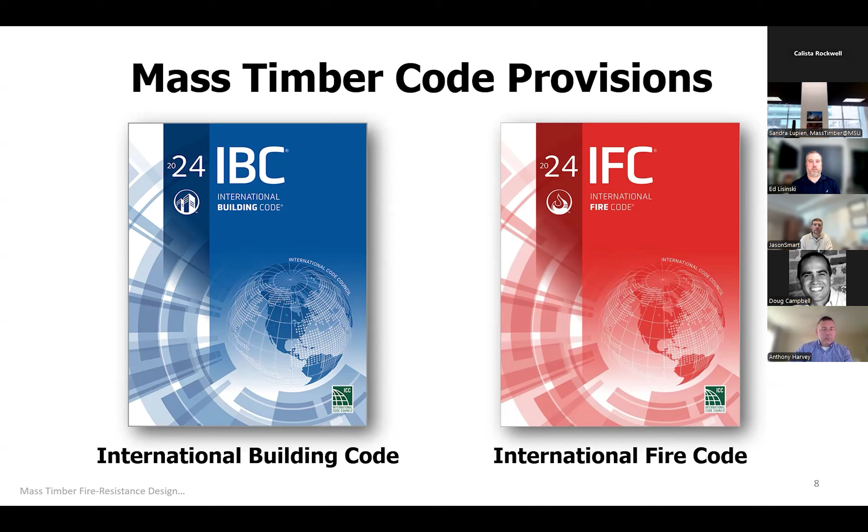As you probably know, the three new mass timber construction types in the I codes are types 4A, 4B, and 4C construction. Several of the key performance features built into these new provisions for 4A through 4C construction are listed here on this slide.

These are not all of them, this is not an exhaustive list, but I'm just going to go through some of them here. As I mentioned, every building element needs to be either mass timber or non-combustible in these three new construction types.

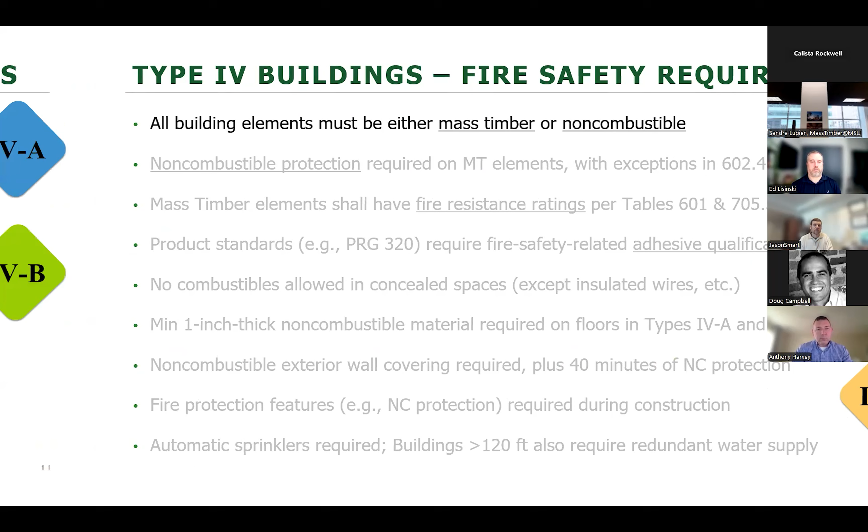Mass timber elements need to be protected with non-combustible protection as specified in section 602.4. For most mass timber surfaces in type 4B, and all mass timber surfaces in 4A, the requirement is that two-thirds of that fire resistance needs to come from non-combustible protection.

Structural elements are required to have fire resistance ratings as shown in IBC tables 601 and 705.5. It's the greater of those two fire resistance ratings that applies.

The adhesives used in CLT are required to be qualified through a series of both small scale and large scale fire tests, to ensure that they do not undergo heat delamination during a fire that could lead to fire regrowth rather than continual cooling.

No combustibles are allowed in the concealed spaces, except for those materials which are currently allowed in plenums by the IMC, International Mechanical Code.

In types 4A and 4B construction, one other requirement is that mass timber floors are required to have a minimum 1-inch thick non-combustible material above the mass timber.

In all three of these new construction types, everything outboard or to the exterior of the mass timber in exterior walls is required to be non-combustible, except for the water resistant barrier, and that's required to meet other fire performance thresholds.

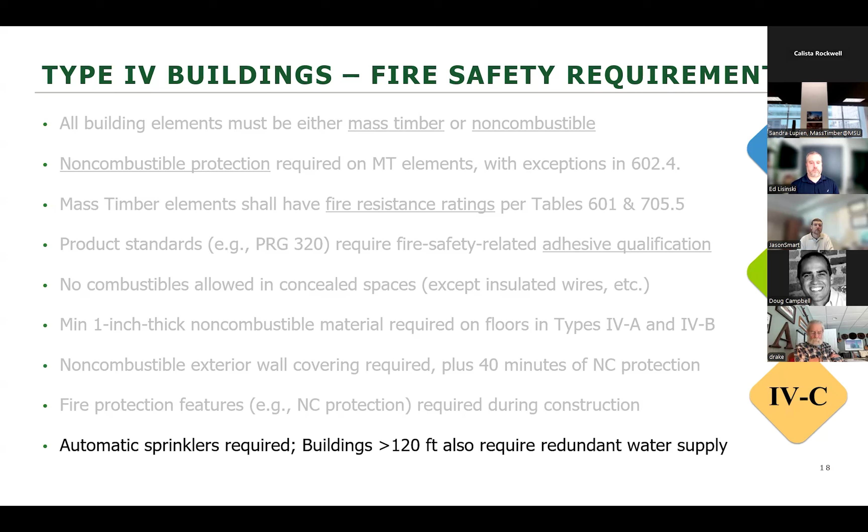These go beyond the requirements for other construction types. Also, shafts are required to be constructed of non-combustible materials in mass timber buildings that are over 12 stories or 180 feet.

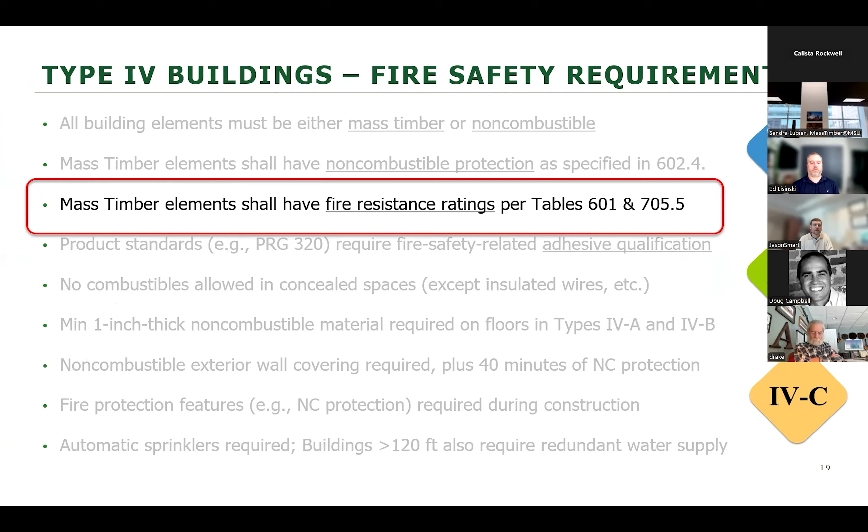But of all the fire safety requirements that we just went through, the one that I'm going to dwell on in this presentation is the requirement for fire resistance ratings in accordance with IBC tables 601 and 705.5. You may know this already, but I'm just going to go through this review.

There are required fire resistance ratings in the building code for given building elements, and that depends primarily on the type of construction in table 601. In the case of exterior walls, there are also requirements in table 705.5 that depend on occupancy group and fire separation distance, in addition to construction type.

So here's one of the big differences between traditional heavy timber construction, now called type 4HT, versus the three new mass timber construction types. The new mass timber construction types require fire resistance ratings for building elements like the primary structural frame, floor, and roofs, whereas type 4HT doesn't have any specific fire resistance rating requirements.

Instead, type 4HT building elements are required only to meet the minimum cross-sectional dimensions specified in table 2304.11. By the way, those same minimum dimensions apply to the mass timber elements in types 4A through C as well, but they also have the minimum fire resistance rating requirements.

Likewise for both 4B and 4C, the same fire resistance rating requirements are applicable as are applied to type 1B construction. So here we have 2-hour fire resistance rating requirements across the board, except for non-bearing walls and the roof, the roof requires a 1-hour rating. Non-bearing walls don't have a minimum requirement.

So despite these equivalencies to type 1 construction in terms of fire resistance ratings, the limits on heights and areas for 4A through 4C are not unlimited, as you can see, or as you probably already know. They're not shown in this table, but type 1 construction, of course, has unlimited heights and areas for most occupancies, but that's not the case for types 4A through 4C. So that just adds one of the several layers of fire safety that apply to mass timber in the code provisions.

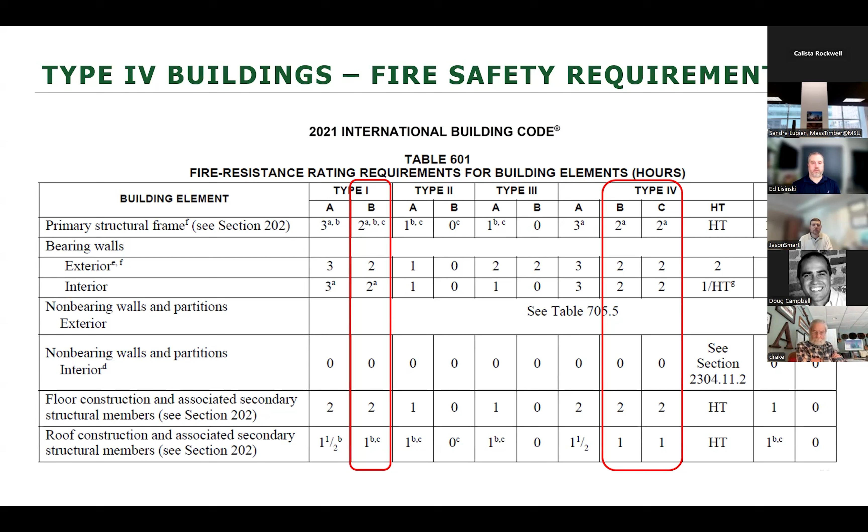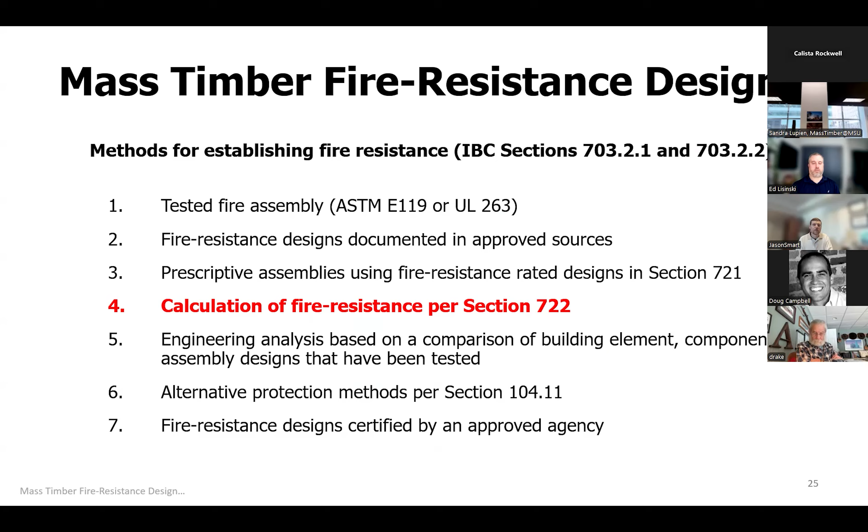Of the 7 recognized methods for determining a fire resistance rating, the one I've highlighted in red here is the one we're going to dwell on most today, and that's calculation of fire resistance ratings per section 722. All right, so moving on to the second section.

So we just took a brief look at the fire safety related code provisions for mass timber construction, especially fire resistance ratings. Now we're going to look at code reference standards and other design guidance that are available for the purpose of demonstrating compliance with these code requirements.

IBC section 722.1, which I just mentioned as one of the compliance pathways for demonstrating fire resistance ratings, references Chapter 16 of the NDS, the National Design Specification for Wood Construction, for calculating fire resistance ratings of exposed wood members and decking.

AWC's Technical Report 10, or TR10, provides background, empirical validation, and examples on how to perform the calculations specified within Chapter 16 of the NDS. So TR10 is somewhat like a secondary reference in the code. TR10 and Chapter 16 of the NDS deal with the same methodology, a mechanics-based methodology, which I'm going to describe in more detail shortly. In fact, Chapter 16 of the NDS is based on the methodology presented in TR10. However, TR10 goes into a lot more detail and actually gives examples on this methodology. So it's a great resource.

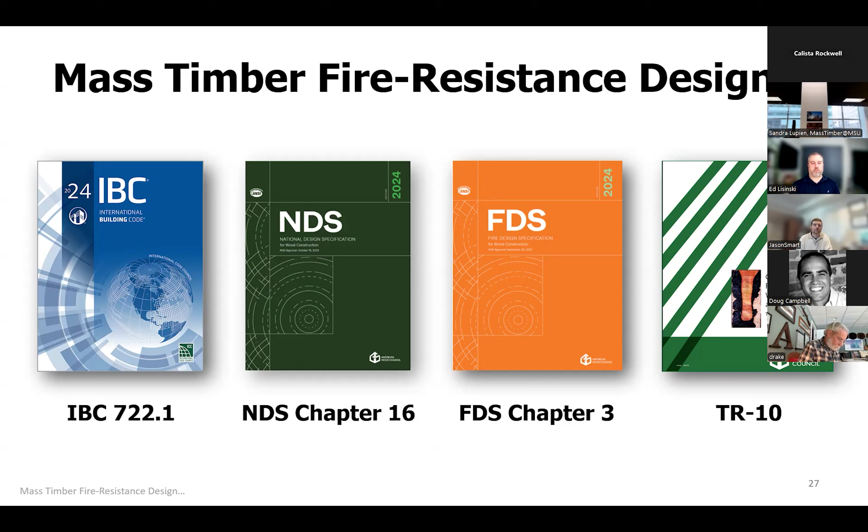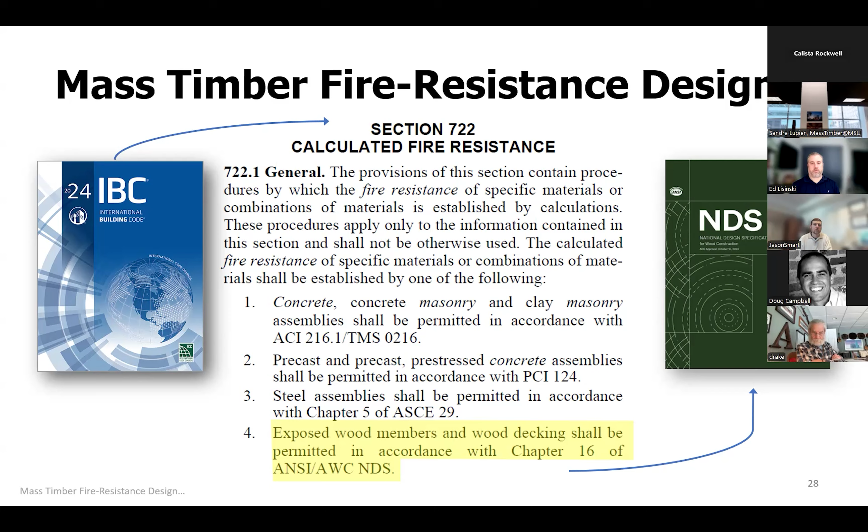Here's the actual code language from IBC section 722.1, which deals with calculated fire resistance. As you can see in the highlighted text here, Chapter 16 of the NDS is referenced as the standard for calculating fire resistance of exposed wood members and wood decking. Notice it says exposed wood members - it doesn't deal with protected wood members, which the FDS does.

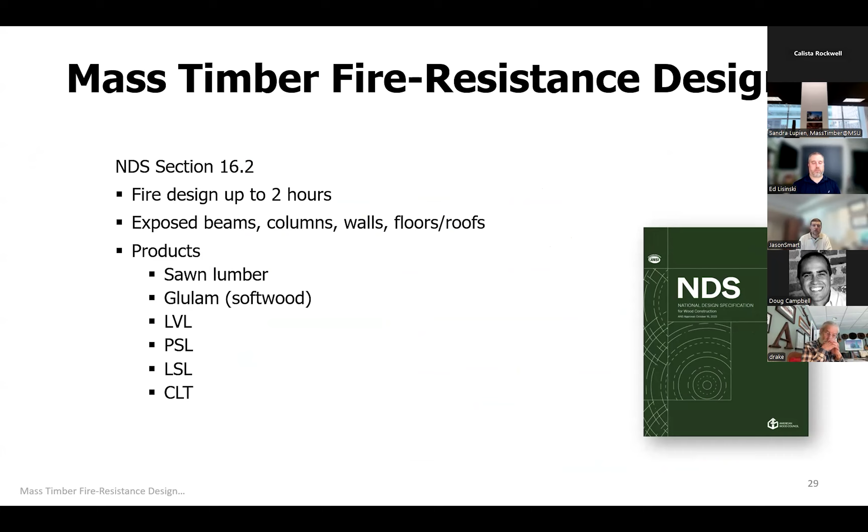Chapter 16 of the NDS allows fire design of exposed wood members for fire resistance ratings up to 2 hours. It applies to any exposed wood member, including those in beams, columns, wall assemblies, floor ceiling assemblies, and roof ceiling assemblies. The materials addressed in Chapter 16 of the NDS include sawn lumber, glulam, structural composite lumber, and cross-laminated timber, CLT.

So the more detailed provisions using the same mechanics-based model are provided in Chapter 3 of the FDS. Like the NDS, the FDS can be used for calculating fire resistance of exposed wood structural members, but the FDS provides a lot more guidance. For example, it has provisions for calculating the fire resistance of protected wood members, fire resistance rated assemblies rather than just members. It can be used for assemblies and also for fire protection of connections.

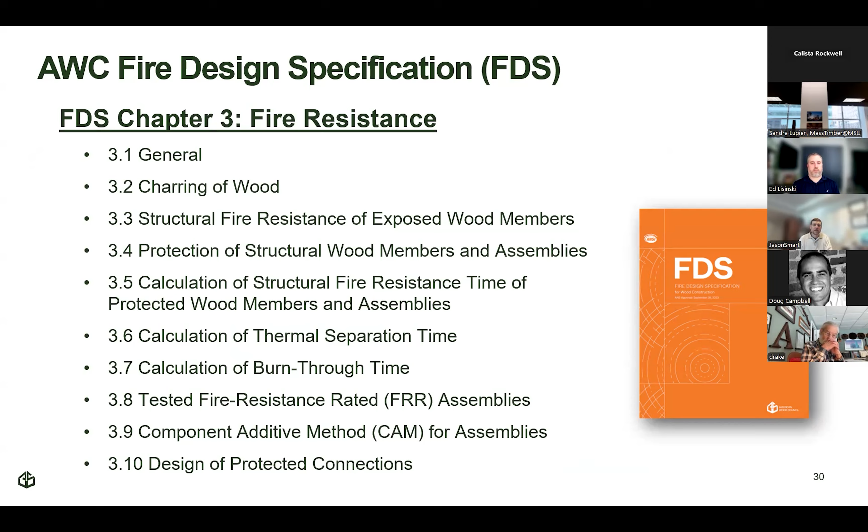Some of the guidance provided in the FDS that's not included in the NDS include section 3.2, where the FDS provides calculation procedures for determining the char depth on exposed wood members. Those are consistent with the NDS Chapter 16 provisions, but the FDS goes further because it implements new procedures that account for char penetration at intersections and abutting edges of exposed wood members.

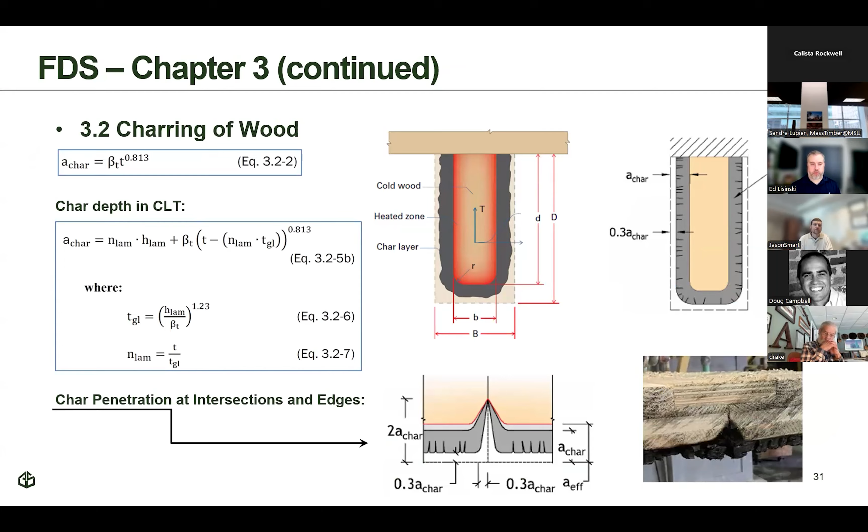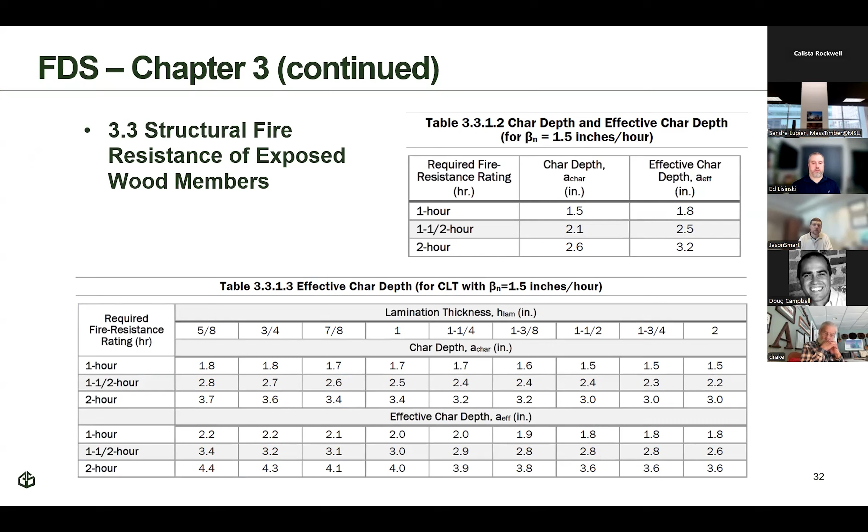Using the char depth calculations determined in accordance with Section 3.2 and Section 3.3, the FDS provides calculation procedures for determining the structural fire resistance of exposed wood members. As with Section 3.2, these provisions are consistent with but more extensive than what's in the NDS.

Once the reduced section properties of the wood members are calculated using the provisions of FDS Sections 3.2 and 3.3, the design strengths used to determine fire resistance are calculated by multiplying these reference design values, such as bending strength and tensile strength, by adjustment factors specified in Table 3.3.2, which you see here. You can see the K factors, design stress to member strength factor.

What the K factors do is adjust it to an average strength level from the allowable stress design level to the average strength level.

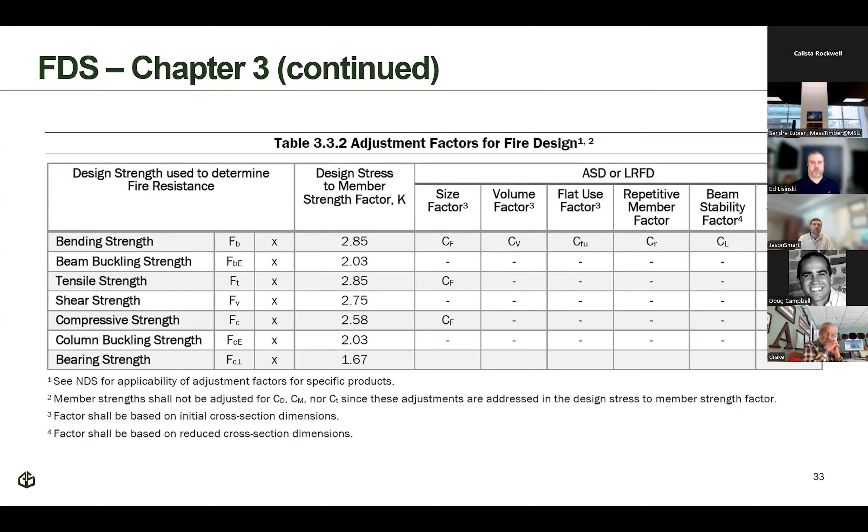Section 3.4 of the FDS contains new provisions for determining the protection time provided by multiple forms of protection. These recognized forms of protection include Type X gypsum, additional wood cover, and certain types of insulation, or you can have any combination of these as well.

The methodology and empirical basis for these provisions are the same ones used to justify the non-combustible protection provisions in the IBC for mass timber.

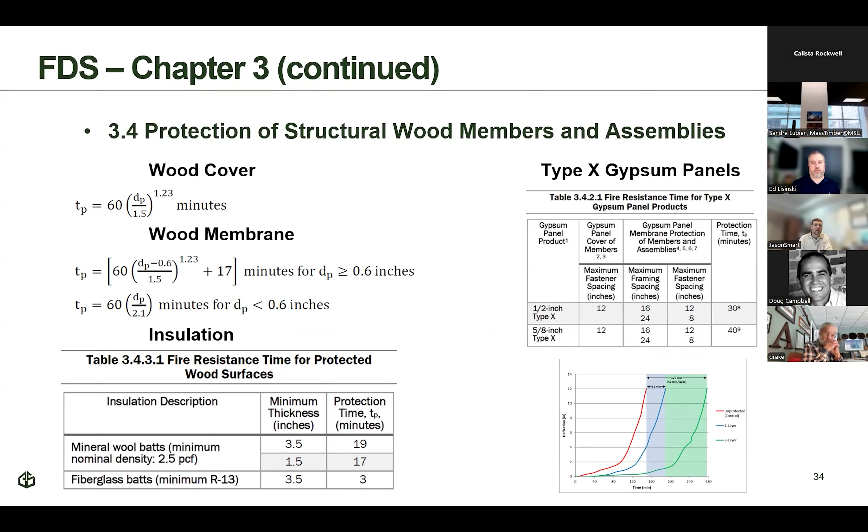Section 3.5 of the FDS contains new provisions for calculating the structural fire resistance times of protected wood members and assemblies. Again, these provisions are consistent with code-recognized procedures for protection of mass timber elements.

I wanted to point out that the FDS provides guidance for design of both combustible and non-combustible protection. One example of combustible protection, the only one I can think of right now, is additional wood cover. Then there are multiple examples of non-combustible protection, but the most common one would be Type X gypsum panels.

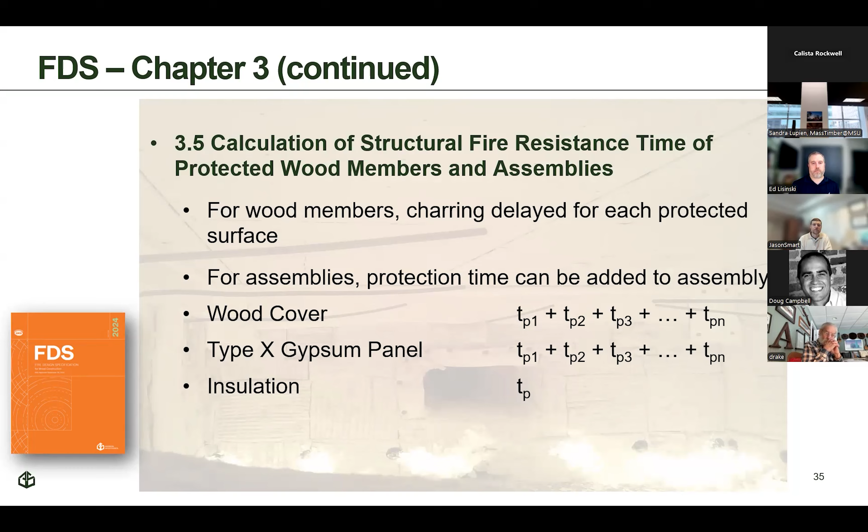In Section 3.6 of the FDS, there are new provisions for calculating the thermal separation time provided by an assembly of wood layers or Type X gypsum protection, or some combination of these, or also insulation. You can use insulation as well.

I wanted to point out that the thermal separation time is a different concept from that of protection time, which I mentioned a couple slides back. Although these same materials can be used—wood cover, Type X gypsum, and insulation—they can be used for thermal separation.

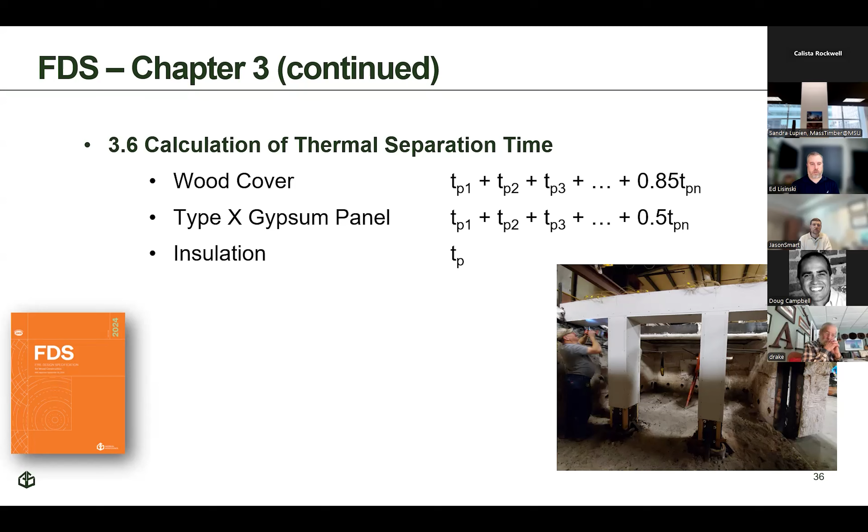The calculation procedure is different for determining thermal separation. We'll get into that in a couple slides when I go through an example or two.

Section 3.7 of the FDS clarifies that burn-through detailing is only required where thermal separation is required. This section then references within the FDS Section 3.6 for the purpose of thermal separation.

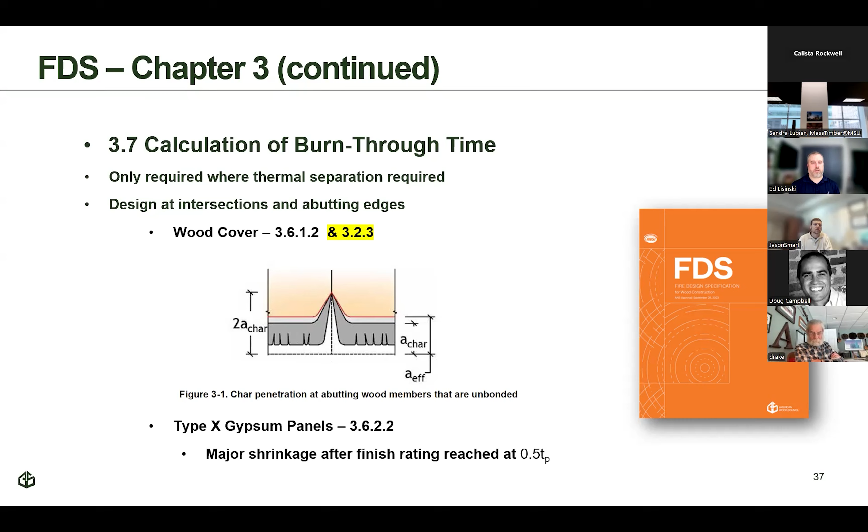Let me go back to that, because I wanted to point out that thermal separation time is crucial when you're designing connection protection, where you have to meet or stay below a certain temperature rise threshold at the interface between the connection and the protection itself.

Importantly, dealing with connection protection, that's where Section 3.10 of the FDS comes into play.

I don't know if we'll have time to get into this in much detail at the end, but if so, I can show some of the provisions there of connection protection in Section 3.10. That'll be in the fourth section.

So okay, let's move into the third section here. How am I doing on time, by the way, Sandra? I don't know, she may have stepped away. You're good, I stepped away, okay. Maybe like 15 minutes or so. Sure, Jason. Oh yeah, in that case I probably can get into at least partially into the fourth section there.

In the third section, I'm going to talk about ways in which compliance with building code provisions can be demonstrated through fire design using these standards that we just went through: the NDS, FDS, and TR10.

Here's FDS Table 3.3.1.2 again. I showed it a few slides back, but let's focus on it more here. It provides a quick design reference for determining the char depth at a given exposure time, and those are the values you see in the middle column of this table.

The char depths are given in inches for corresponding fire resistance rating times of 1 hour, 1.5 hours, and 2 hours. The column on the right provides values of effective char depth, or A effective.

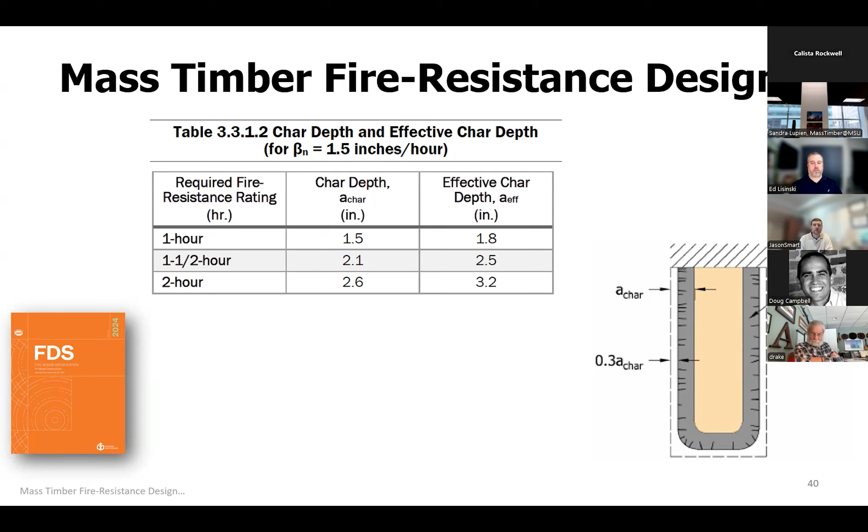So for a design of protection, you'd use that middle column, a char. And the table I showed on the last slide was specific to, or it was for every type of wood material except for CLT.

So let's talk about the model, the char depth model for CLT now. The model was developed through a mechanics-based process, just like the char depth model for all the other wood member types. And as you can see, it fits the empirical data fairly well.

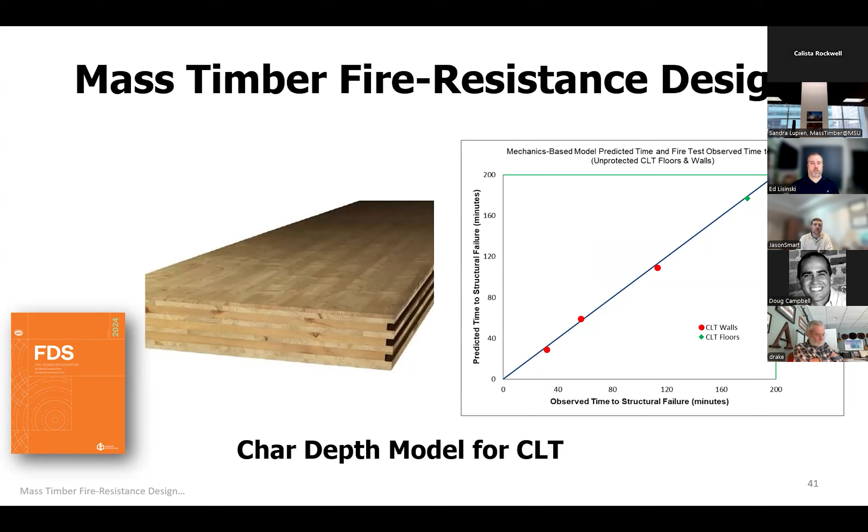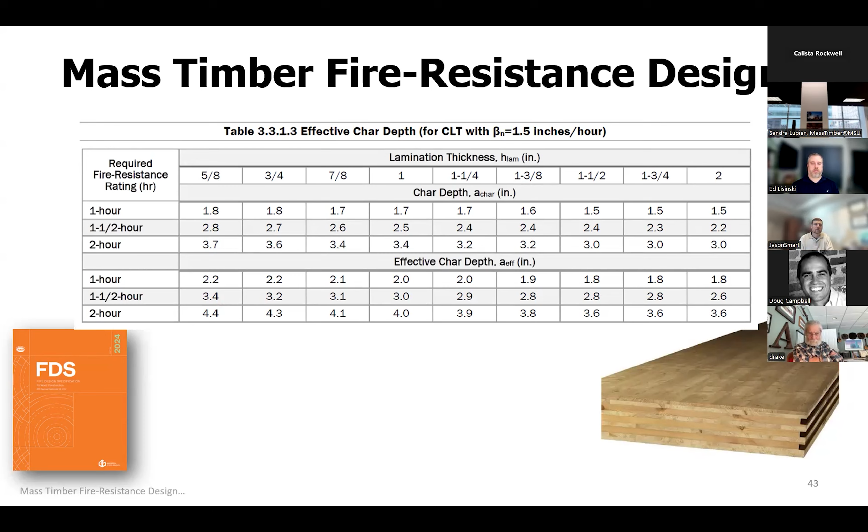Here are the values that come from it. I'm not going to show you the equation for the char depth model, at least not on this slide, I think it might be on a later slide. But these are the char depth values that would come from the char depth model for CLT. Notice that it's dependent on lamination thickness. You can see the column headings there are for various lamination thicknesses. And you can also see that there is a difference between ACHAR, the calculated char depth, and A effective, the effective char depth. Effective char depth is what's used for structural fire calculations.

So using the CLT char depth model, a thickness of CLT that's equal to the effective char depth is subtracted from the exposed surface, just like the procedure used for other wood members. However, unlike for other wood members, the cross-section of CLT has a distinctive orthogonally oriented layer layup, so this needs to be accounted for in the design. And of course, since it's a mechanics-based design, you have to account for the fact that those layers are orthogonally oriented. You can find more detail on how to do that in TR10.

Specifically, example 4.6 gives an example from start to finish on how to perform that calculation for CLT. But then there's also a simplified method for design of CLT, and that's outlined here on this slide.

So, for example, if you had a 5-layer CLT having a 1 3/8 inch thick lamination thickness, the fire design could conservatively be based on design properties for a 3-layer CLT made of the same lamination types, as long as the remaining effective depth is greater than or equal to the combined depth of the 3 laminations. So in this case here, it would be 4 1/8 inch if you had a 3-layer CLT made up of 1 3/8 inch lamination thicknesses.

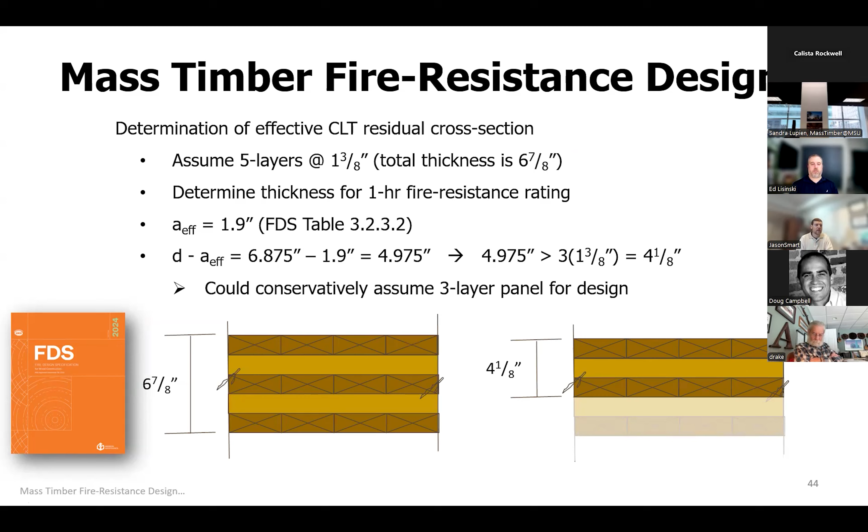I'm sorry that it keeps advancing automatically on me, and I hate that. I need to take that off of this presentation.

So the calculated fire resistance of timber decks, including NLT, nail laminated timber, can be calculated using section 3.3 of the FDS as well. The provisions for NLT are in section 3.3.3.1 of the FDS, and these apply to tongue and groove or mechanically laminated tongue and groove planks or mechanically laminated dimension lumber that's set on edge and nailed to the adjacent pieces. That's basically NLT. I don't know if any of you have dealt with NLT, but those are the provisions in the FDS that would deal with that.

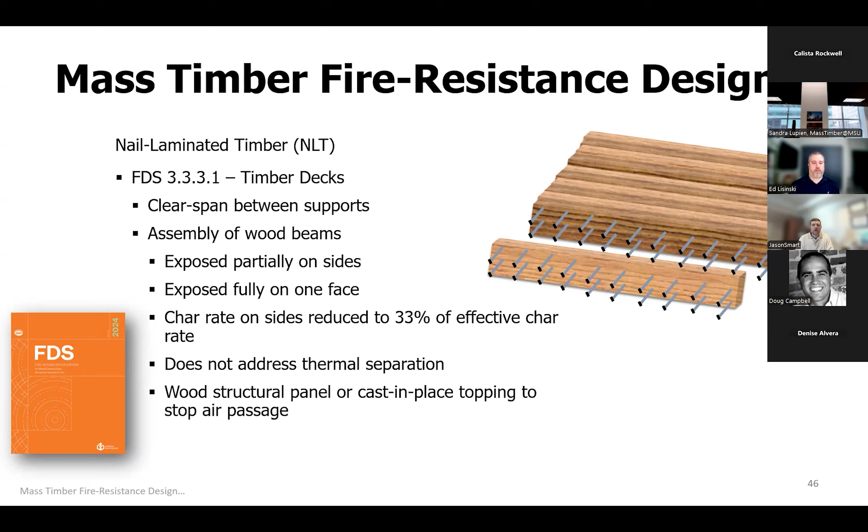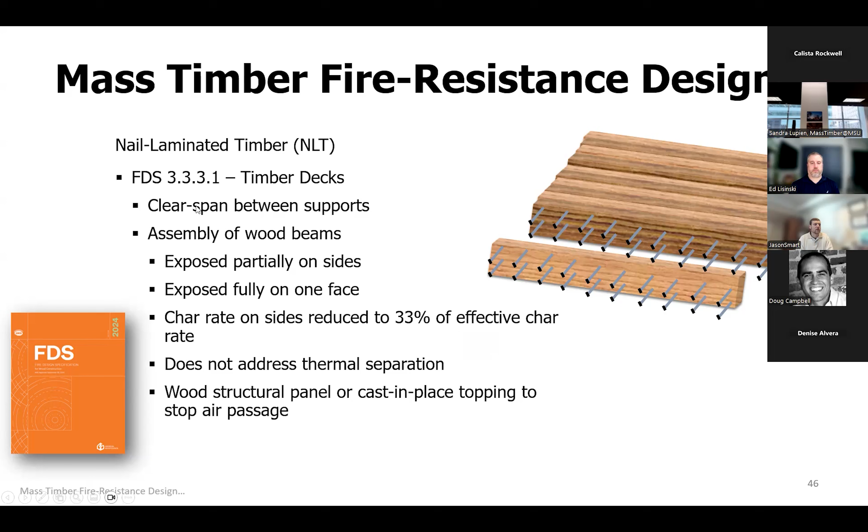And then there are also exceptions to these provisions, and that's what I just mentioned. So these are the 1/3 effective char rate on the edges, and then the full char depth on the bottom edge. So that's like what you have in the NDS. But again, I would recommend sharpening the pencil. You get a more refined answer using the normal FDS provisions rather than the exceptions.

All right, so let's talk about glulam a little bit. For glulam members, they typically have stronger laminations at the top and bottom when compared to the laminations closer to the neutral axis. Because of this, additional tension laminations are required to replace the interior core laminations so that the extreme fiber remaining on the reduced section, after it's been exposed to fire for a little while, still has adequate strength. This detailing provision requires communication and coordination between those doing the fire resistance design and those responsible for the structural design, if those are different individuals. So it has to be ordered that way, specified that way in the plans.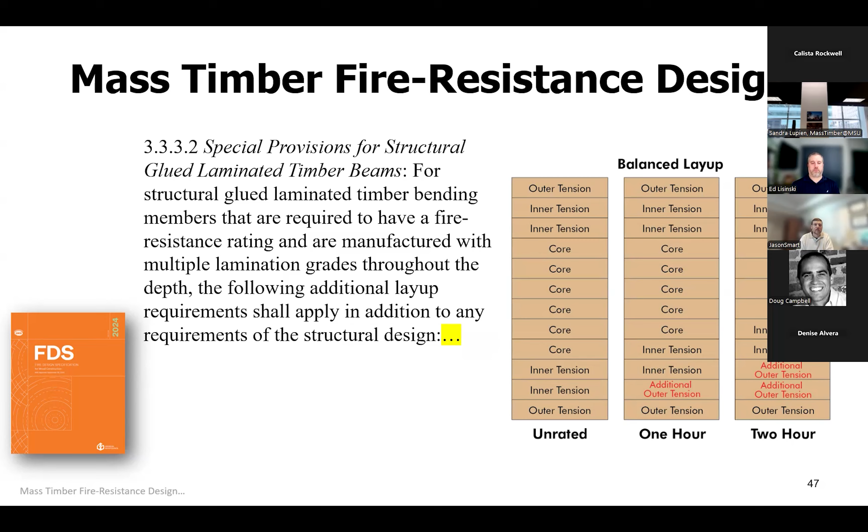And I was going to mention that the FDS contains provisions that are pretty much the same from a practical standpoint. You get the same answer as the provisions for glulam design in the NDS, but the FDS is greatly expanded. It provides a lot more detail, and additional illustrations are provided in the FDS that are not in the NDS, along with a lot of additional provisions.

All right, so far I've only been talking about the calculations used for calculating fire resistance of exposed wood members. Using this mechanics-based method, there are two main factors that go into determining the fire resistance of an exposed wood member, and one of them is, of course, cross-sectional dimensions. The greater the cross-sectional dimensions, generally the greater the fire resistance rating.

And then secondly, the other one is the load ratio, or the ratio of the actual load applied to the ASD design load. The fire resistance rating of a member would be greater if the actual load applied is less than 100% of allowable stress design. The reason for that is, of course, because if there's less load applied to the member, say less than 100% of the allowable stress design value, then less section is required to carry that load. So it allows for a greater amount of time, or more section loss, because time is equated to section loss when you're talking about fire resistance duration or fire endurance.

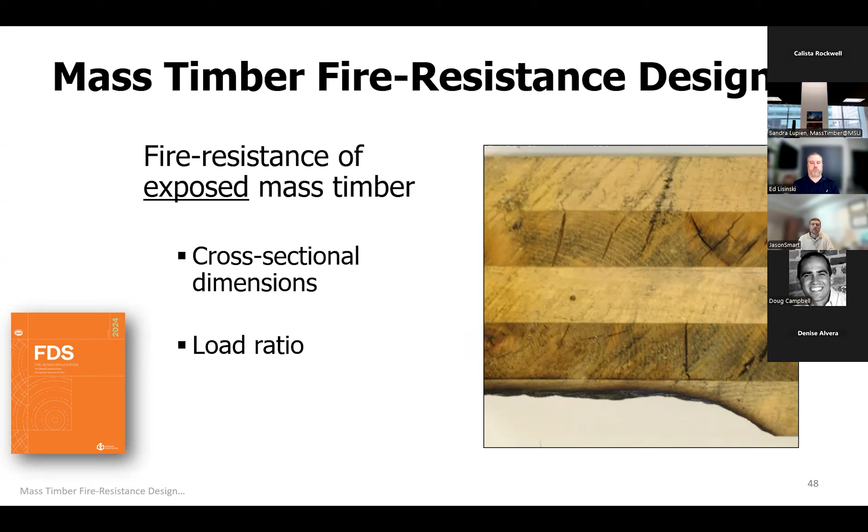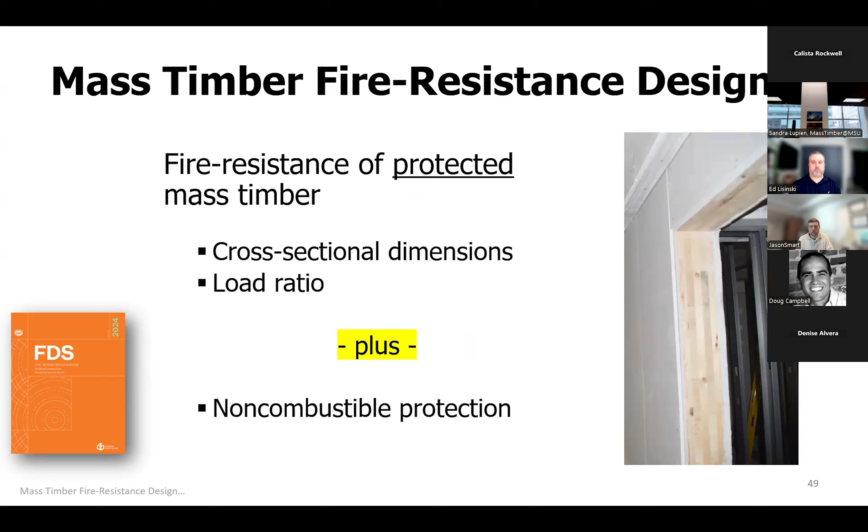So remember that when it comes to the new fire resistance ratings for the new mass timber construction types, you're allowed to combine -- in fact, sometimes you have to combine -- the calculated fire resistance rating of the wood member itself with the fire resistance rating of any non-combustible protection that may be applied to the surface of the wood. This is a very important point, because it's actually one of the characteristics that distinguishes fire design of wood from that of other construction materials. For wood, you can rely on a calculated amount of inherent fire resistance of the member itself. And then, if necessary, you can add to that the time associated with any additional protection that's added to it, either non-combustible protection or combustible protection, as the case may be, like additional wood cover.

We got about 5 more minutes here, Jason. Okay, I may not be able to go into the fourth section then. Okay, that went fast. Sorry.

All right, as I mentioned, the FDS section 3.4 provides guidance on how to determine the amount of protection time that's provided by additional wood cover and wood membranes. This graph shows the equations that are in section 3.4. You can see here in this graph, the blue line shows the time that you would get related to various thicknesses of additional wood cover, and then the orange line is wood membranes.

The difference is that wood cover is in direct contact with the protected wood member, whereas wood membranes are not. So a wood membrane would be like plywood applied to a wall, a stud wall, for example. It's not in direct contact, at least not full contact with a surface. Part of it is exposed, or it's open on the backside.

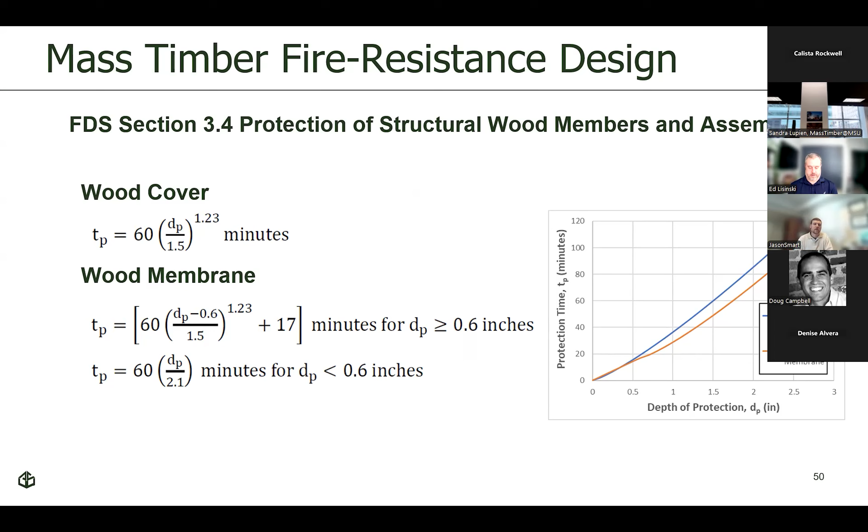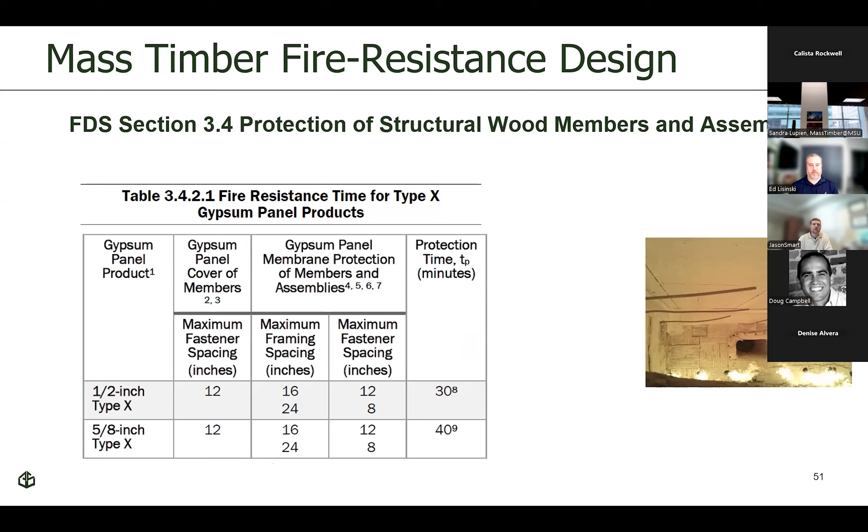FDS table 3421 quantifies the protection time provided by Type X gypsum panels, and these are the same values you see in the IBC. You get 30 minutes of protection time from half-inch Type X, and 40 minutes of protection time from 5/8 inch Type X.

These are all based on empirical testing, of course. FDS table 3431 quantifies protection times provided by different types of insulation, specifically mineral wool batt and fiberglass insulation. There's a big difference between the value for fiberglass insulation versus mineral wool insulation, and the reason is the relative melting points of those insulation types. By mineral wool, I'm talking like stone wool, whereas fiberglass, the glass melts at a lower temperature. But you can rely on at least some contribution from the insulation to the overall fire resistance rating of the assembly.

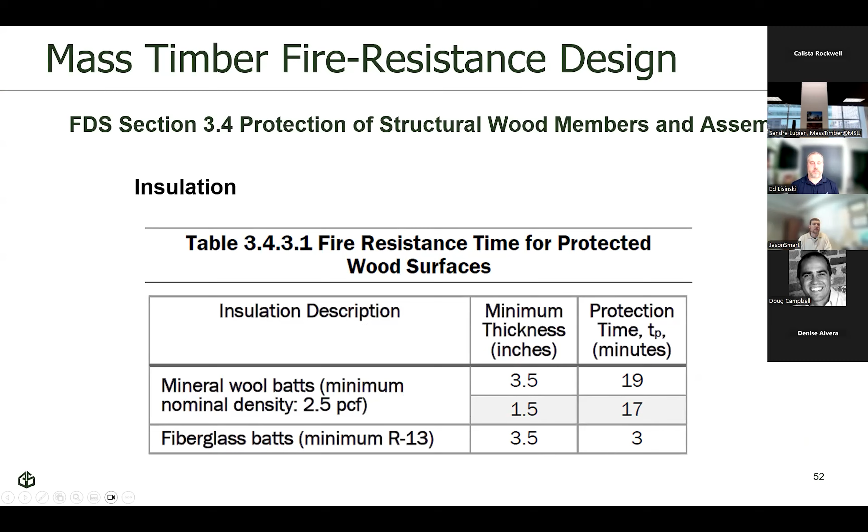All right, well, I don't know. Maybe I won't get into connections here. How much time do I have left, probably like 2 or 3 minutes? Yeah, I mean, it'd be good just to start. Okay, go ahead.

Let me at least point out there's a fundamental difference between type 4, traditional type 4 construction, which is now type 4 HT, and types 4A, B, and C construction. I mentioned that fundamental difference earlier, that types 4A, B, and C require fire resistance ratings for most of the building elements. That makes a big difference when it comes to connections, because connections between building elements are required to have at least no less than the fire resistance rating that's required of the connected members.

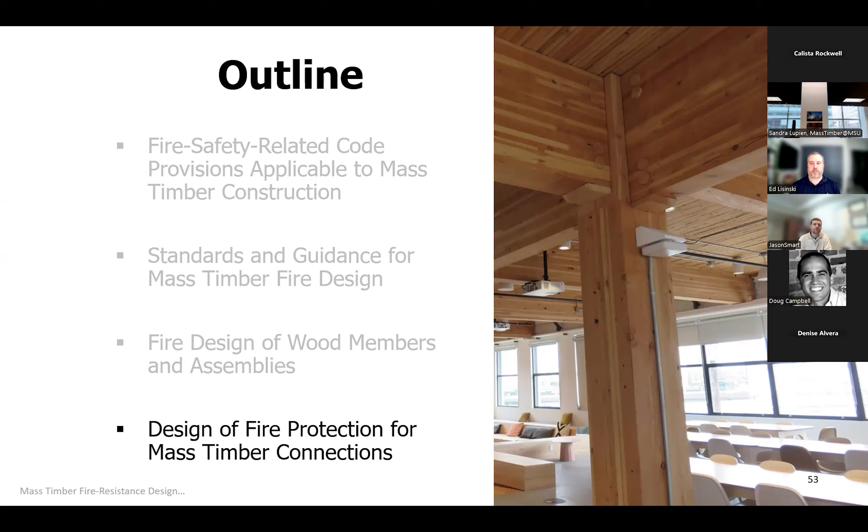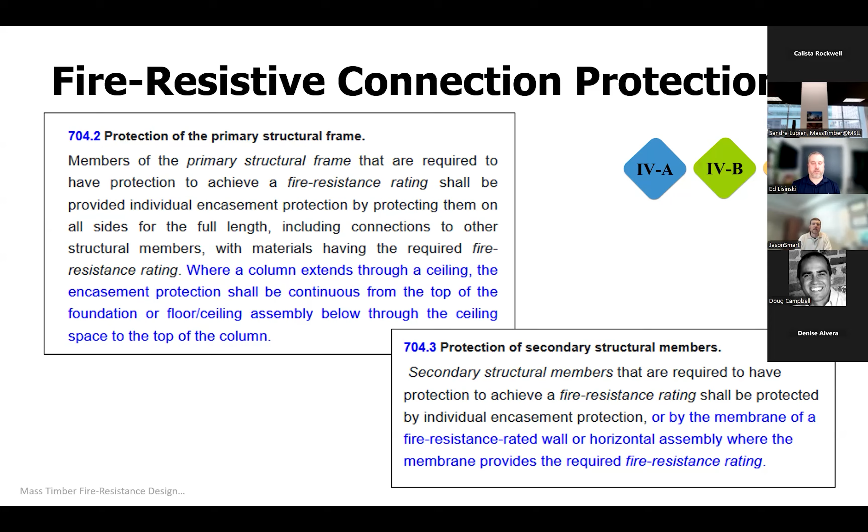So in order to ensure those connections have a minimum fire resistance rating that meets that requirement, you actually have to protect the connections. That's where IBC sections 704.2 and 704.3 come into play, which require that you protect the connections for the minimum fire resistance rating, period. Then 2304.10.1 of the IBC provides two different ways to demonstrate that minimum fire resistance rating of the connections: one is by testing, and the other is by engineering analysis.

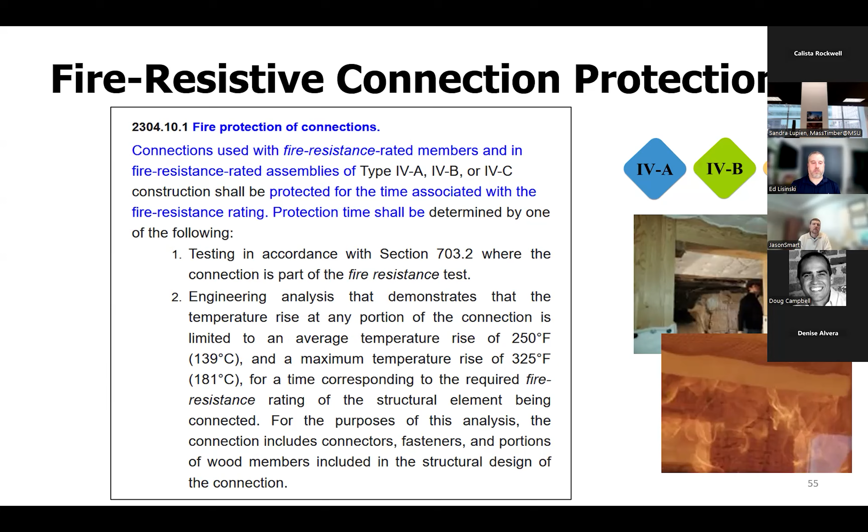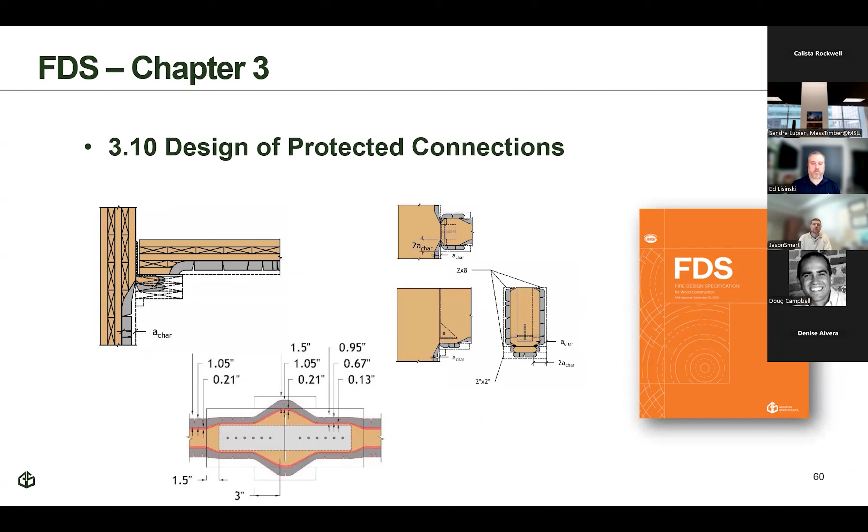The engineering analysis approach is the one addressed in the connection protection provisions of the FDS. It basically specifies that you can't exceed a temperature rise threshold of 250 degrees at the interface between the protection and the connection itself. Section 3.10 of the FDS goes through how that can be accomplished, how you can demonstrate that you meet that temperature rise threshold and do not exceed it at the interface.

I'm sorry, I knew we would run short on time because this was designed to be a 1 hour presentation. But if you have any questions about any of that, including connection protection, I'll be happy to answer. And just to reiterate to everybody, the full presentation is out there on our website, a recorded version of that. So if anybody's interested and can't find it out there, feel free to reach out and I can send you to the right spot if you want to watch the last little part about connections.

Well Jason, thank you so much for that presentation. I think that was a lot of excellent detail, and I am going to need somebody to do a Schoolhouse Rocks version of that for me to get it. But really good, and I'm sure very relevant for many people on this call. So thank you, and thank you Ed, for getting Jason mobilized to do this.